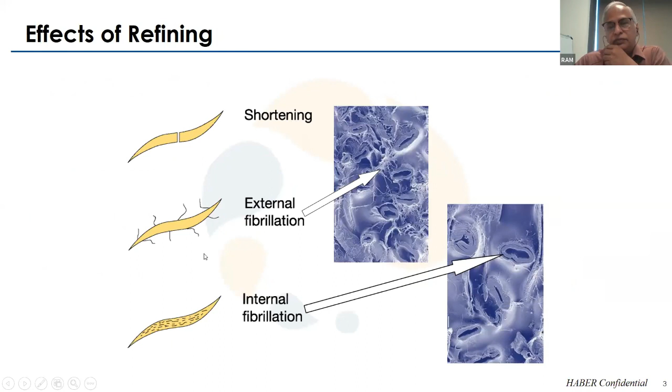So you are all masters in refining, but just to catch up at the beginning of the call - ultimately what happens inside the refiner is that either too much energy or bad operation can cause fiber shortening. There is something called external fibrillation and internal fibrillation, and the amount of energy given for refining very much impacts these as well as the paper properties.

So ultimately, the objective of refining automation is consistent freeness. This is very difficult to get in the absence of substantial amount of data being generated, which is hard to know, and typically there will be some process variations. In spite of this, how to get consistent freeness - that we will see.

And energy - before we talk about savings in power, it's very important to understand how much energy to provide for a particular situation, because each day it may be changing. So there will be a lot of factor of safety - if you want to give 400, people may be keeping 430 or 440 kilowatt also. So there is a blind area.

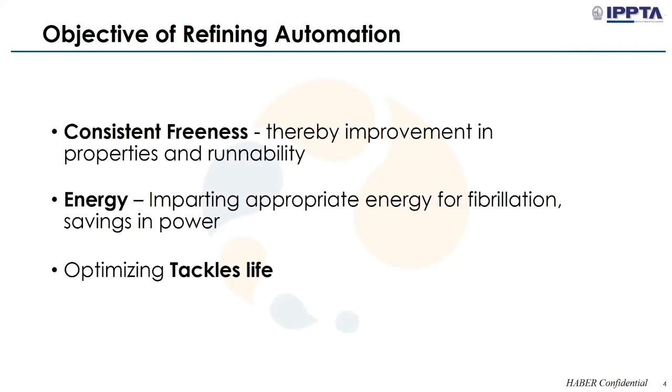So how to do it without this? You have a loose connection, it is making a voice. Please check the audio, there seems to be somewhere a loose connection. I think please check the plugging part or somewhere - I don't know where this loose connection is making sound. Just a second. Is it better? Yeah, much better. Please go ahead.

So the most important thing around refiner automation is, first, consistent feed to refiner in terms of flow and consistency, and also the recirculation rate, and differential pressure across the refiner, and the energy imparted into the fiber. All these three make it very important for a consistent operation of the refiner.

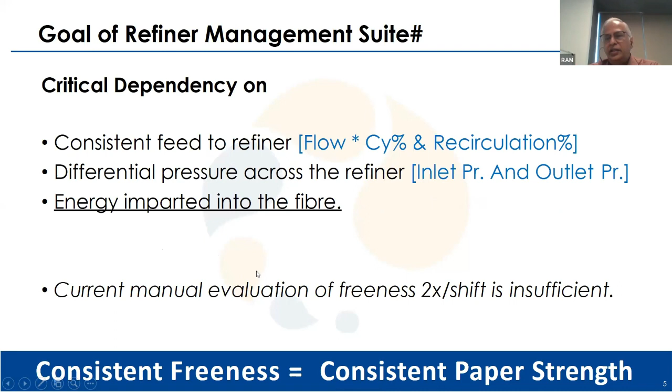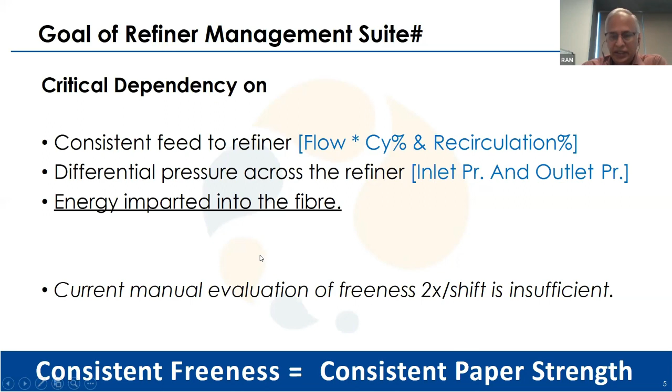Currently, the maximum that is done manually is an evaluation of freeness, which also takes certain time to get the results, and at maximum 2 times per shift is done. This is quite insufficient - unless we get consistent freeness, we cannot get consistent paper strength or quality.

So what is this? What we have designed is based on artificial intelligence, something called a refiner management suite. In this, the core area, we have tried to include every aspect around the refiner.

The hydraulics first thing is more important, as I said, is the hydraulic stabilization of process. That is the flow, consistency, and recirculation, how you balance the refiner. That forms a very important part. For this, every system has to be separately evaluated and certain modifications need to be made if required.

So that done, then there is a calculated energy management through artificial intelligence. There are a lot of options for virtual analytics based on which you can get very useful data, or process assurance.

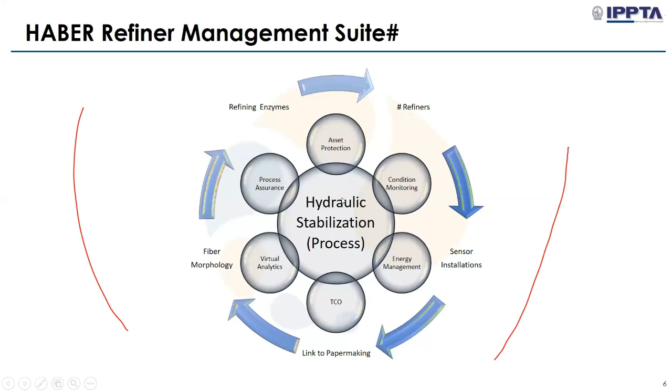Then we have also included the maintenance aspect around the refiner, that is the asset protection as well as condition monitoring, like refiner bearings, motor bearings, because these are the things that are also affected when things like plate clashing etc. are done.

And if there is anything specially that you are doing, basically we can add any sensors that you have in the field, and we can analyze the input, like any ash flow or anything like that. Basically any sensor we can also provide, so how that impacts your final net refining as well as paper properties, that can be done.

Then you are linked to paper making, your paper grades and properties. And if needed, this can also be expanded to include, instead of a freeness analyzer or in addition to a freeness analyzer, a fiber morphology unit can also be added. And with this you can even evaluate different refining enzymes or different tackle manufacturing.

So in a way that we have designed it, every aspect around the refiner is covered in this package.

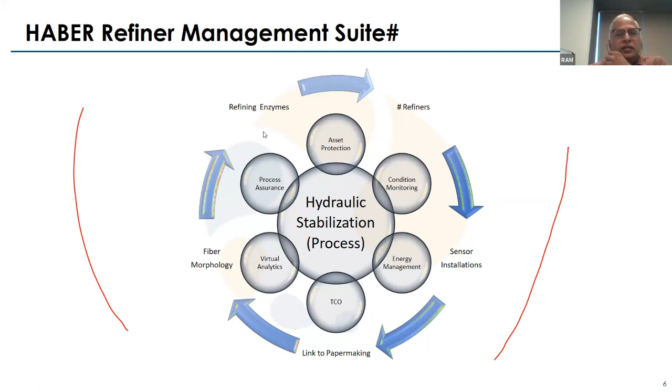So if you see the approach to a refiner management suite, the most important core central part is hydraulic stabilization process, you have process stabilization. You have to control basically flow, consistency, pressure, and recirculation rate. These form a very important part of managing the refiner.

And the influences are pulp pH, viscosity, and pulp strength. And energy optimization, how to evaluate and directly give only that much energy that is required to manage the fibrillation, and also measuring, frequent analysis of freeness results.

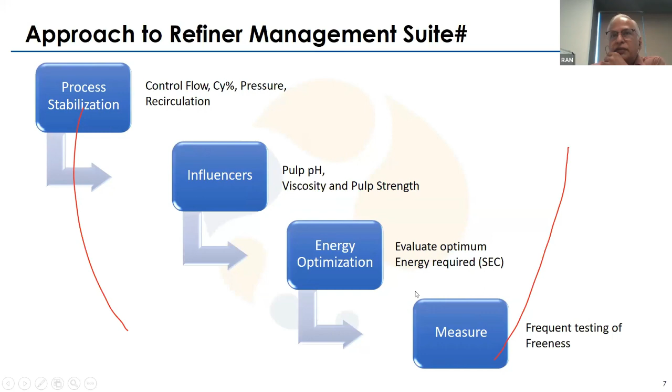The online freeness analyzer will be added to this. You will get, depending on the number of refiners, you will get readings at that much frequency.

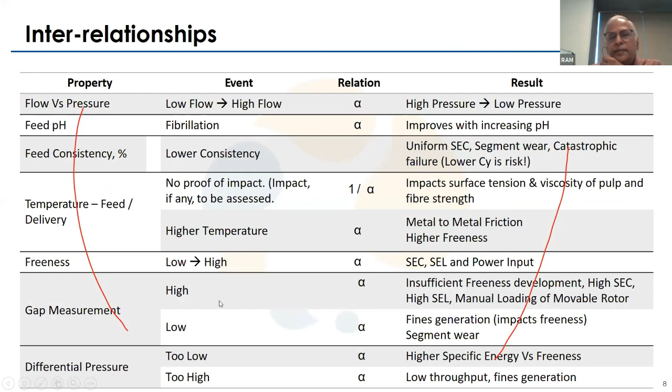This is the most important one, this will be constantly tracked. And then we track segment life in real time. So the segment loading, the new segment loading date and all will be entered there, and it will be tracked over the life, and there will be gap sensors.

So we'll see the change in gap depending on loading as well as the energy given. We can see how the segment is influencing the properties, and also the maintenance aspect, bearing conditions and motor conditions.

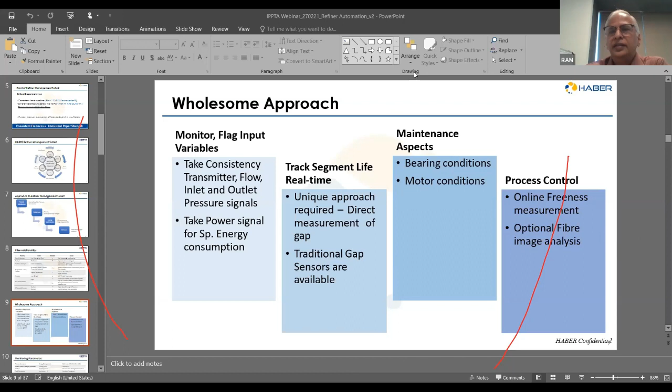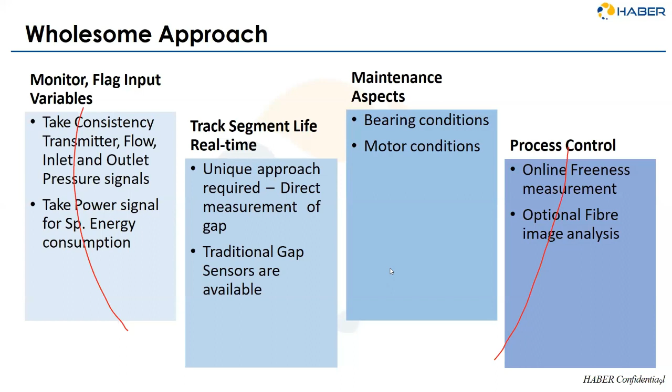So as we get into the process control, online freeness measurement as well as an optional fiber image analysis can be added. These are the 4 aspects we have divided it into, forming a complete package for your refining.

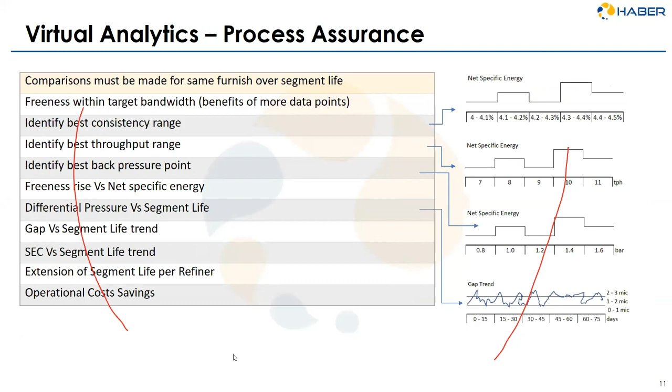So then, as I said, we can do virtual analytics as well for process assurance. Basically we assure that it's done as per the desired targets. So here we can compare as we collect data, we can compare different things. First important thing is the freeness we collect, and we can ensure it is kept within a certain target bandwidth, and what is influencing it most depending on your furnish, piping design, and everything.

We can identify the best consistency range by making a comparative graph trend of consistency range versus freeness that you get. This can be collected, and then artificial intelligence, through mathematical deductions, will identify the best consistency range to operate your refiner. Similarly for throughput, we identify the best back pressure points. For each of these process properties, trends can be developed and we can identify the best areas to operate.

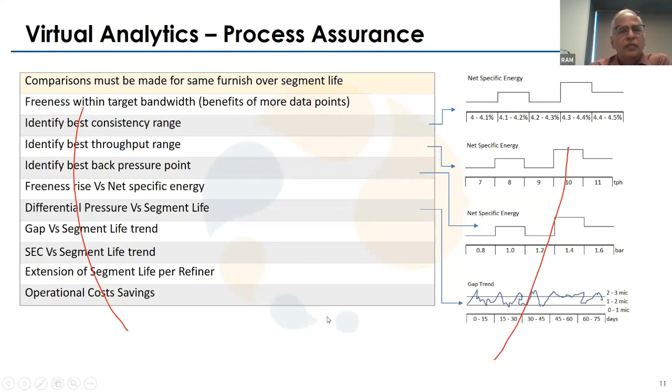We can link the machine operations also to the refining part. Basically, we measure the freeness after the refiner and manage the refiner operations accordingly. Apart from that, generally after the refined chest, some broke may be added before it reaches the paper machine, or some save recovered fiber may be added. These things may once again affect the freeness of the pulp before it reaches the machine chest, so if required, additional samplers can be used after the machine chest or mixing chest as well.

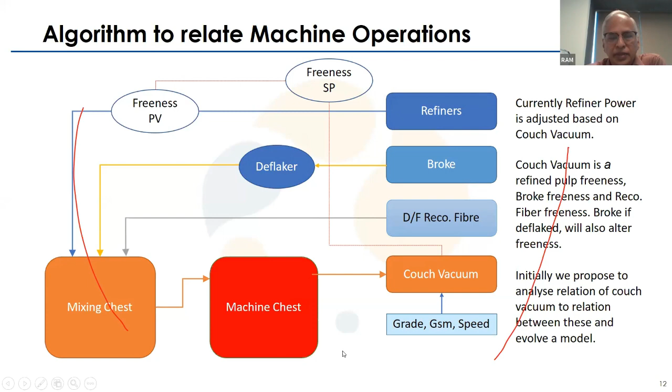Depending on the provisions made in your paper machine, or provisions we can add, we can take critical data like grade, GSM, speed, even headbox flow, Couch vacuum, and press loads, anything. Whatever you think affects the wet end formation or strength properties of your paper, against a survey of each paper machine, these things can be loaded and analysis made on how refining is affecting this.

Similarly, for paper properties, we can take each of these paper strength properties. Ultimately, refining affects the density of the pulp, and density in turn affects many strength properties of paper. I listed some, but it could include others like bulk, etc. Depending on that, once the duration is reached, a manual testing is done.

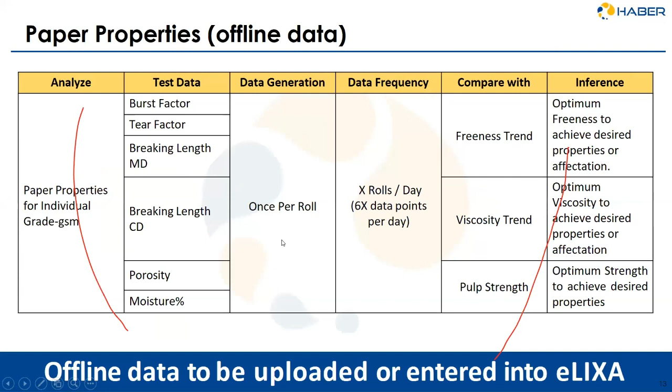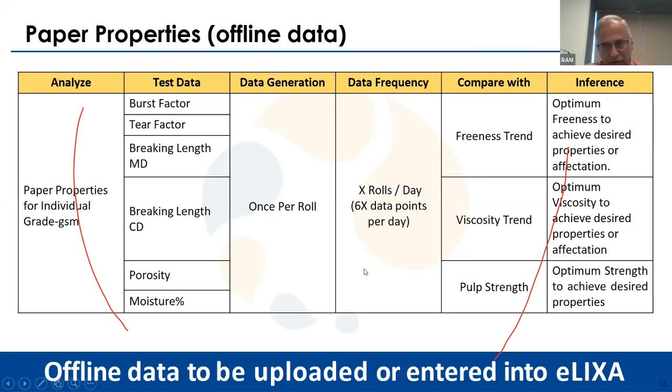These test results can be uploaded to eLIXA. There are many ways in IT now that you can upload physical data into the cloud. So if this provision is available, fine, or we can also make some provisions. So whenever a test result comes in, it can be uploaded onto the system, and the previous 1 hour of data will be analyzed along with the refiner operations. Depending on that, we can identify paper properties. This could be especially useful for specialty papers or high grade board grade papers.

Whatever be the type of refining, it could be by application pulping or stock preparation, this is applicable to any of the refiners. There is a certain importance to each of these refiners by type or position, so all this can be monitored here.

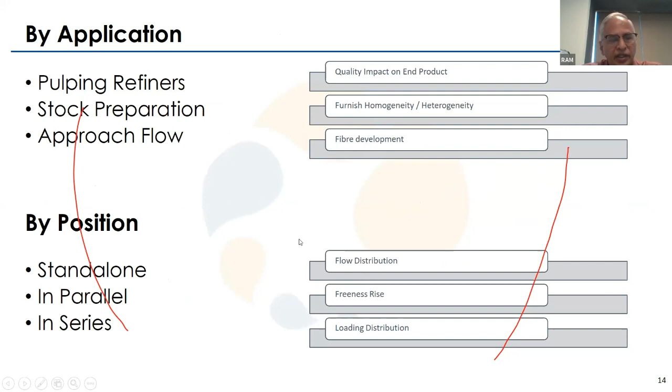As we go into the subject, one of the things fundamental to doing any automation is like computer language only, garbage in and garbage out. So it is very important that we focus on stabilizing the input variables.

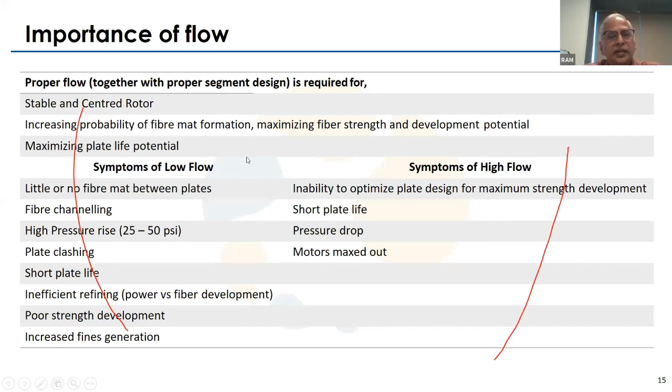Importance of consistency, again, is very important for hydraulic balance and even segment life, because refining consistency is directly related to getting the fibers onto the bar edge. So performance will be exponentially better in terms of consistency. We will choose the right consistency range, and we can experiment and choose the right consistency range based on this analysis.

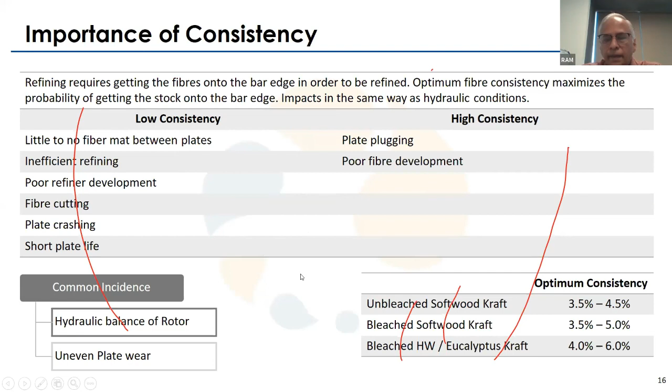So these are the rotors, most of the refiners, the central twin-disc refiners and all that, the rotor is centrally balanced. So the stock flow is very, very important to maintain the stock flow and a proper consistency.

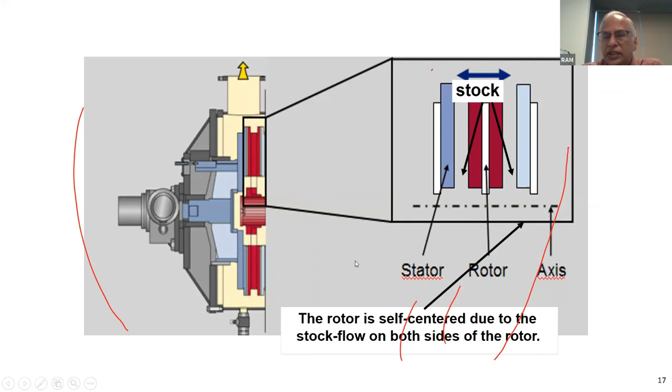So the root cause for flow variation, these are the possible effects. One is of course the variation from the pulping street, this can be optimized to the maximum. In many places there is a lack of level control. The chest level control greatly affects the pumping ability of the pump because of higher consistencies. So it's very important a good level control is managed, and the level is also maintained at a very nominal level within a very small bandwidth.

Retention time of the chest, the rightly sized chest, is also important. And also type of flow control, whether it's a VFD in the pump or a control valve - depending on that, the plus and negative effects can be taken into account, because the way each of these controls the flow is slightly different.

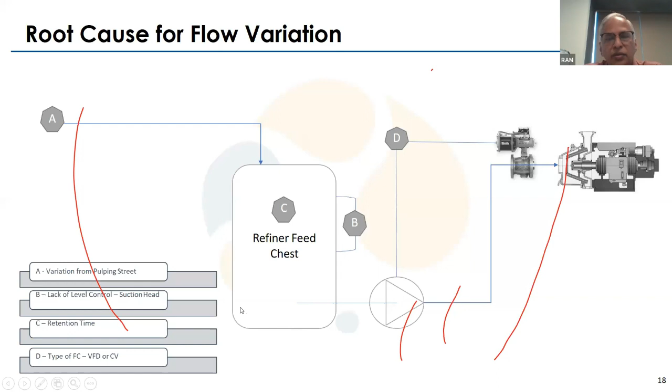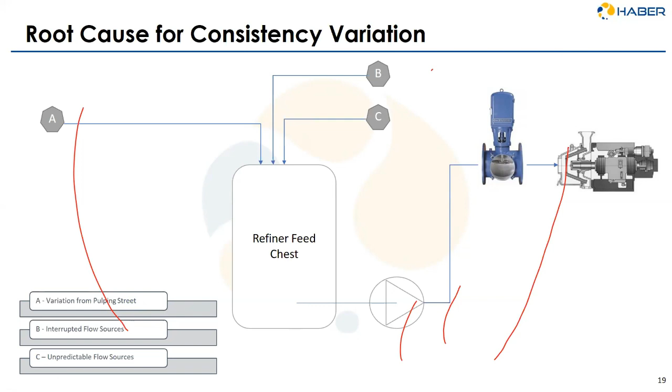Unpredictable flow sources - in some cases there are even people connecting directly couch pit pulp or anything like that, which nobody knows when it will increase the consistency, the flow, when it will be available. So a lot of these unpredictabilities around the refiner feed chest should be removed. The refiner feed chest becomes like the heart of the operation of the automation system, so this has to be dealt with with a very sharp eye.

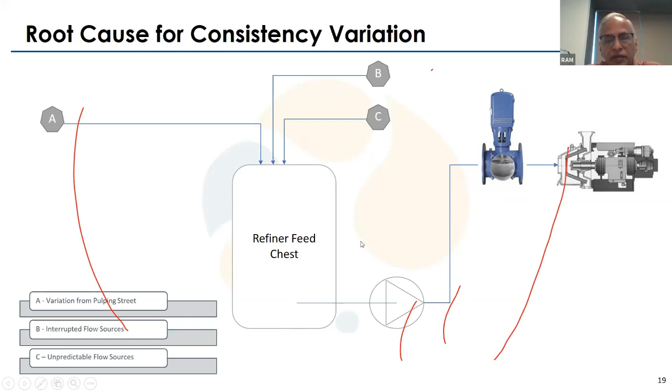So this is an ideal flow and consistency control ahead of the refiner, and the importance of tank level also. Many people operate 0 to 60% or 0 to 40% down - these things can be avoided because each level change affects the performance of the pump greatly.

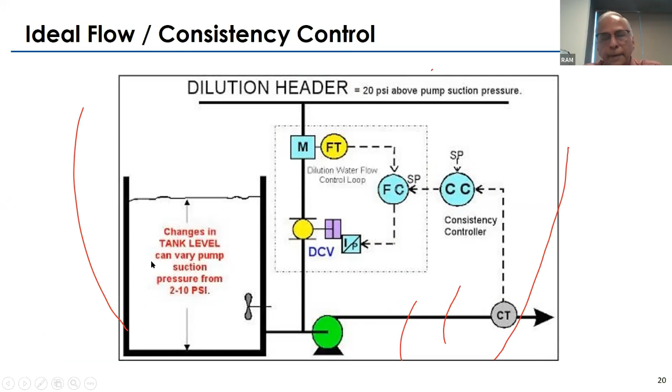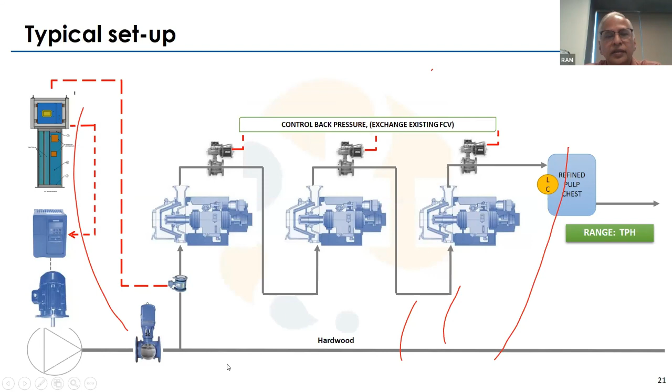Freeness analyzer sampling depends on a survey of each system depending on number of refiners. It's typically like a 3 refiner in series, and we can take a sample for input pulp as well. Usually depending on the Freeness analyzer, you get the number of samplers. There are also other models where you can increase the number of samplers. Basically, we have to work out how many points you need a sample to be tested. But the only thing to keep in mind is the more samplers you add, the less time within an hour you get per position. Like if you have 4 samplers, one particular position will get 15 minutes of data. So it has to come in cycles, and this can be managed.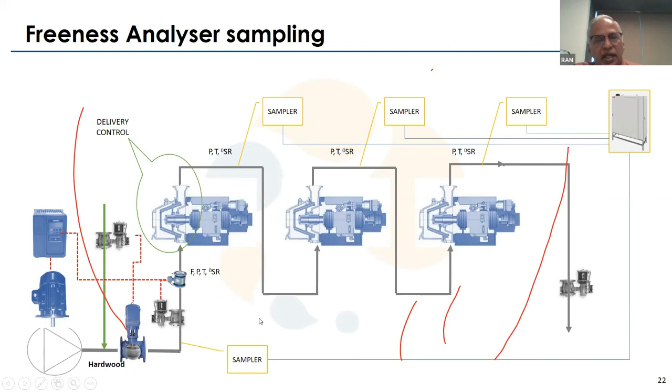Typical field instruments can also be connected to the Elixa control, and apart from that, anything missing can always be added. Because of the interrelationship, all this data is very important in identifying the root cause of problems around the refiner.

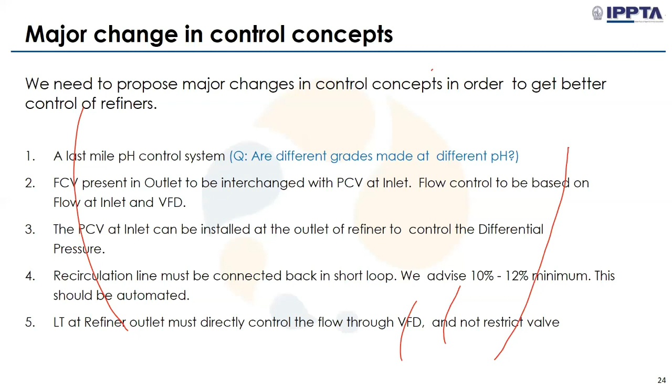So when you have a flow control device and suddenly constrict or throttle the flow at the outlet of the refiner, you inadvertently make a change in the pressure around the refiner, which in turn can affect the differential pressure around the refiner. That's why in some cases, particularly in series or parallel configurations, when you control the output flow, if there are 2 or 3 refiners, one refiner may not be equally loaded - it becomes highly loaded, causing plate clashing or excessive heat generation. This is observed in many cases.

So one of the things we recommend is that the FCV present at the outlet can be interchanged to the inlet, or we can have a VFD for the refiner feed pump. The set point for this can be arrived at from your refined pulp chest level, or it can be made a standard set point, or the level control of your refined pulp chest. That set point can be generated for the flow, and the VFD controls the flow of the pulp.

Similarly, a PCV at the inlet can be installed either at the inlet or outlet, but that's only a marginal adjustment difference. A recirculation line must be connected. It's very important - theoretically as well as from several practical attempts, even by TAPPI, everything has shown the recirculation rate must be between 10 to 12%. Only then is the benefit of already refined pulp going into the refiner derived.

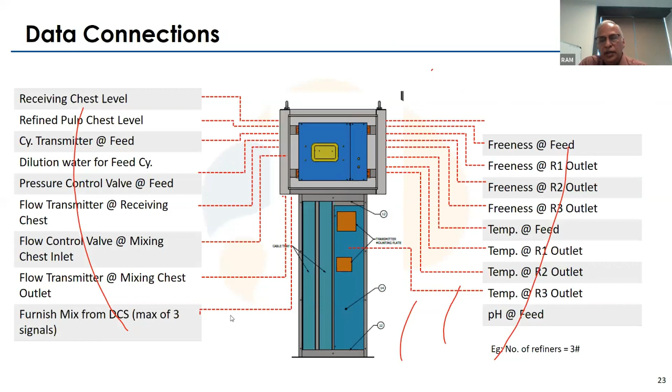In many places this is not done - less than 5% is recirculated, or in some cases the recirculation line goes back through a very long route, sometimes to the top of the refined feed chest, where it loses its ability to give the benefits. So it should come in a very short loop, either back to the feed pump suction or just ahead of the pipeline itself, ahead of the refiner.

And the LT at the refiner outlet must control the flow through the VFD, as I already mentioned, and not restrict the flow through a control valve at the outlet of the refiner.

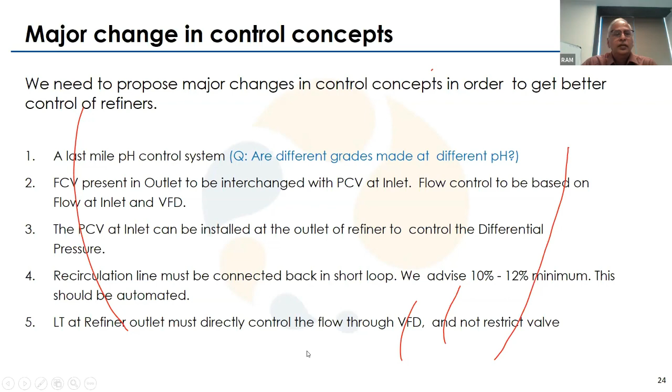So these are some of the problems when you have refiners in series. If you have a flow control valve at the outlet and you're just managing the level of the refined feed chest, the third refiner is very likely to have issues because the inlet PCV of the first refiner maintains a certain pressure, and there are subsequent pressure drops around each refiner. Sometimes even between the first and second refiner, a pressure let-down is done. But regardless, each refiner works at a set of differential pressure points. Particularly when you control the FCV, the third refiner will very likely handle uneven differential pressure, due to which it may get heated up, or higher wear of the segment can happen.

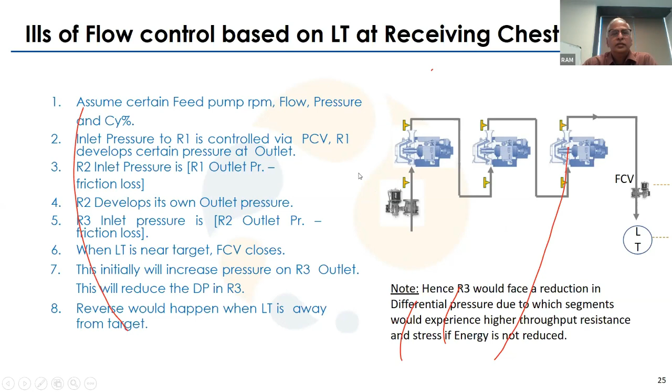So then there's energy input. There's a lot of theory around this, and the most important thing is to calculate the no-load of the refiner. No-load is defined as, in the absence of pulp, what load is taken by the refiner. But while it's easy to say in theory, in practice it's very difficult to consider, because once you have only water inside, unless you have furnish inside the refiner, it's very hard to balance the stator and rotor. So you cannot just run an empty refiner — it's very risky because you might damage the segments.

You can damage the segments, and even the measurements you take, the pulping effect will not be very uniform. Basically the hydraulic load that develops on an empty refiner has been studied many times, just to theoretically calculate it. But if you try to practically do it, it's very hard to sense the exact power consumption at that point. So for no-load calculation, we can do that.

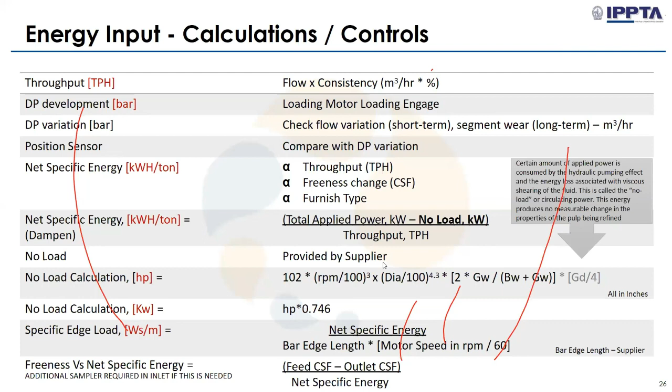I hope I have covered most of the questions. If there is anything further, you can still write to us, not an issue, or we can address it at the end of the session.

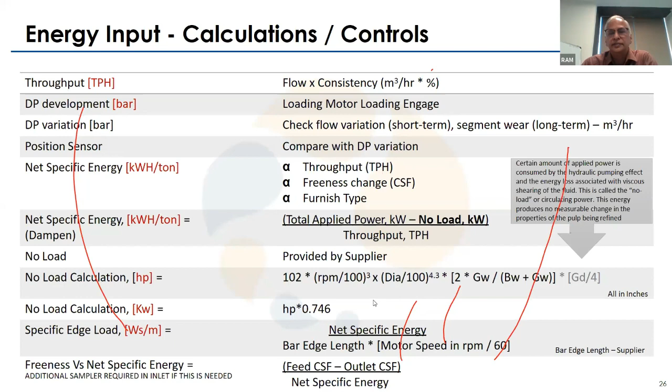So widgets are basically something like your dashboard, similar to what we have done in Elixa for many of the other applications as well. Particularly here, when you have more visibility, more parameters or trends visible on your dashboard immediately near the refiner DCS room, you have better control of the refiner.

There is actually no limit to the number of widgets you can have, but depending on preference, certain things you can see very quickly online, while major calculations you can view later in the records, or download as Excel or CSV files and observe.

So basically you have a number of very important things around the refiner like production rate, recirculation percentage, refining hours, freeness. These are just general plant data, and these can be made visible immediately on your dashboard.

Then there are certain comparative trends immediately, like minute-by-minute trends for processes such as freeness and feed rate, or freeness versus consistency. All these comparisons are available per second on your screen, so you don't have to do a post-mortem exercise. That will be another advantage.

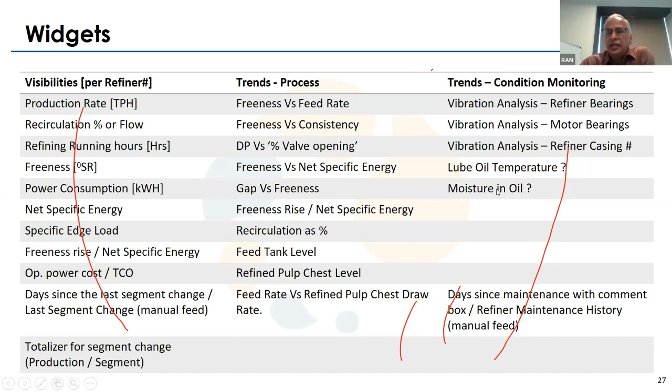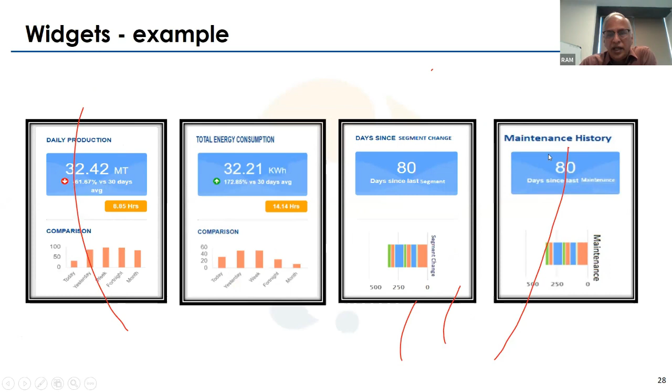This is how the widgets will look like, typical for any application showing daily production and how it's comparative to previous days or previous months. A very quick view of your daily production, total energy consumption, how many days since your last segment change, and your maintenance history, how many days since your last maintenance. These are the things on the production level.

We can have feedback on how much production has happened per segment since it's installed. This way we can compare back-to-back different segments from different suppliers, or a different design of segment. This can be done. And for energy consumption, you can compare different trends, energy consumption versus flow and consistency.

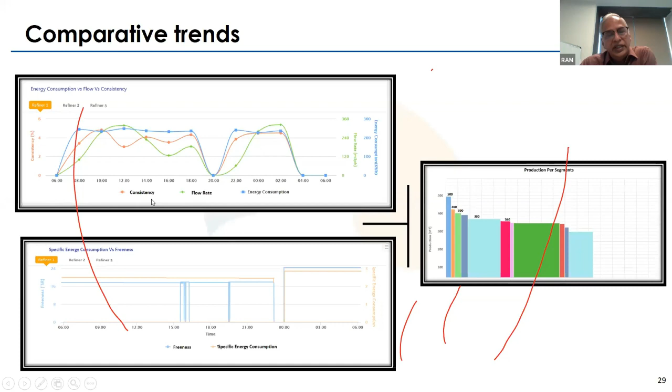There is an option where if you don't want to see consistency, you can switch it off, and you can see only flow rate and energy consumption. Similarly, if you don't want to see flow rate, you can switch it off at a click of a button, and you can see consistency and energy consumption.

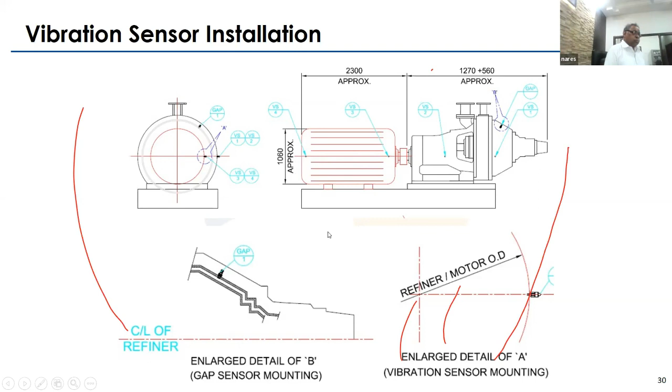Then there will be, because these are high powered motors, a drive end bearing sensor and a non-drive end bearing sensor. So you can have a trend of this also.

There are two ways of seeing this. One is what we call the raw data from the vibration sensor - as it picks up, it is transmitted, it is evaluated, and a trend can be made. Or where required, depending on customer, if root cause analysis needs to be done, we can have a Fourier transform analysis, FFT analysis done also, based on which you can find a root cause analysis for each of the vibrations.

Sorry, please ignore the red lines that is showing up. We don't know where the source of it is.

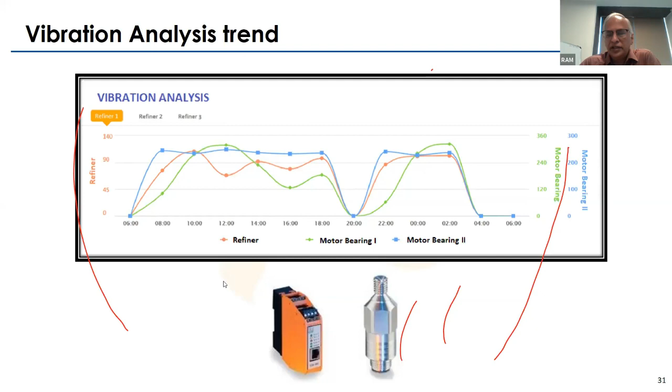Coming to gap sensors. This is typically shown for a conical refiner here in the drawings, but in a tri-disc refiner or a double-disc refiner, the fundamentals are the same - only how we mechanically install it will vary. That we will survey for each machine and identify.

We will calculate the sensor capability based on your typical erosion thickness of your stator and rotor, whether it is maximum 5 mm or 8 mm or anything like that. We will evaluate it, then have it installed here. This will continuously give the micron difference between stator and rotor.

As the gap increases, we can also analyze whether the erosion in the segment - say your segment is coming for 90 days - we can analyze the energy that is needed within the first 30 days, 30 to 60 days, or 60 to 90 days, depending on the erosion level.

More importantly, there are several times segments are removed based on past experience - okay, last time it came for 50 days, so I should now remove it at 48 or 50 days, we should be ready to remove. In this case, it may not be necessary because we will really be assessing the erosion level, and only at some point can we detect, yes, it can be a planned shutdown, yes, the segment has to be changed.

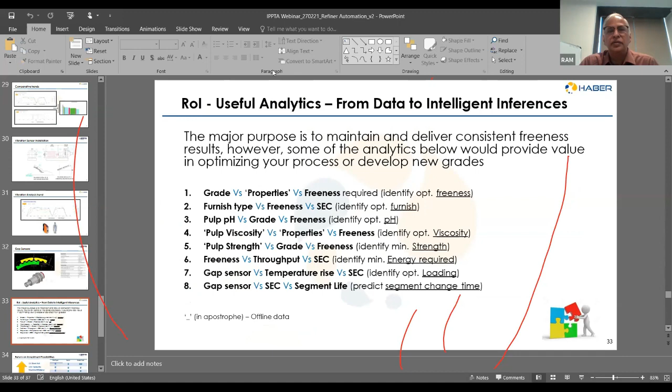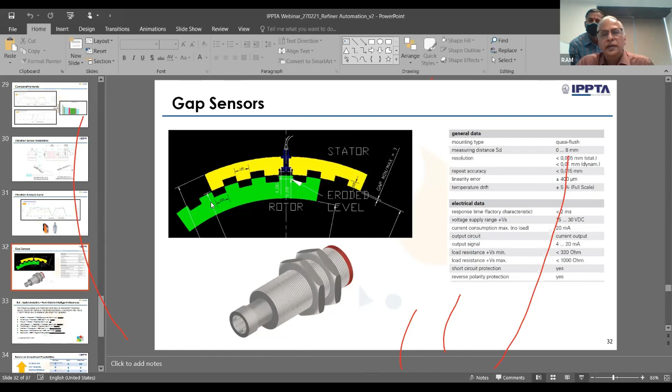Whether this refiner control package includes fiber morphology measurements, that's a question to you. Yes, it can be made because it is only an added instrument. This can be tailor-made. Like I said, you can have a freeness analyzer, you can have a fiber morphology analyzer, or you can have both. The package can be tailor-made.

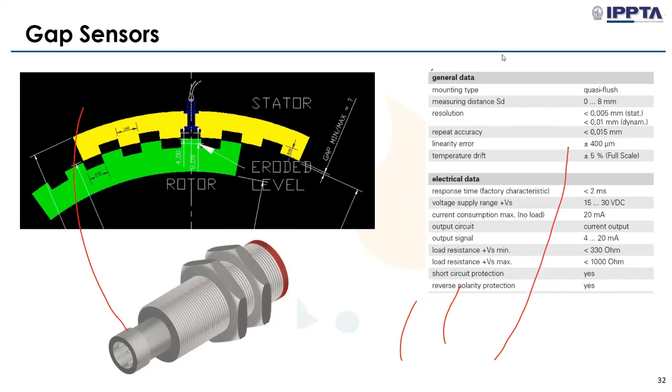Can you show a live example? We don't have one right now, but this package is in concept stage. Whatever we are proposing, this algorithm for doing any process optimization, we have live projects involved, like we have for a pulp bleaching plant. We are getting very clear pulp brightness targets on dosage, retention time, etc. And we are getting a very good bandwidth of pulp brightness. So basically, this method of algorithm development is only like a software, and even if we notice certain error, this can be corrected in our next version of the software. So nothing goes terribly wrong. Basically, we can do continuous improvement all the time. It is possible.

Does refining enzyme retain the final strength properties? Yes, instead of me saying it will work or it doesn't work, what this program can do is make a better judgment of comparison between with and without refining enzyme, or between two different refining enzymes. What it can do now is give you more data to compare, keeping other things constant, we can pick what the refining enzyme is really affecting, and we can give you a better analysis so that we can remove the judgmental errors in that.

Some concept comments on machine refiner located in the approach flow system? I think it is all the same. Like I said in one of my slides, irrespective of the position of the refiner, we will discuss with the customer on what is the more core important thing around that refiner, what they are trying to do, even if it is a proper refiner freeness race. We will discuss depending on what comes out of the survey. Whatever is important, we will focus more on that.

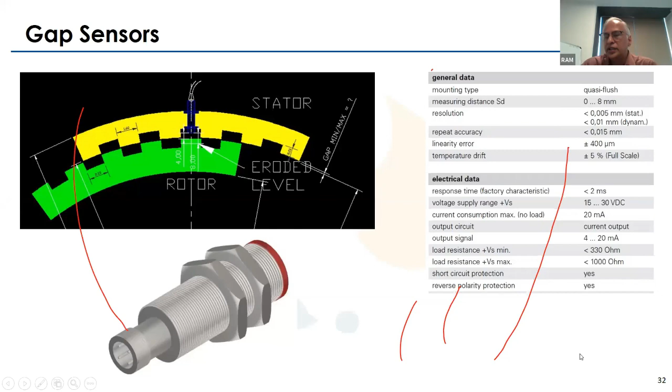I think all questions are done. I am hearing a child's voice and a lady's voice despite everybody having been muted. Can somebody help us, please? Please go ahead.

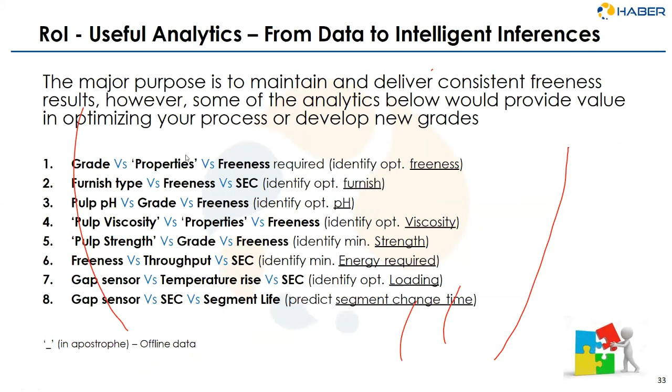Coming to, after doing this, I hope this concept is clear. Now, return on investment, so it's a little back and forth. Particularly, there is not a big investment in the first place. You don't have to invest, but I'll come to that later. But the return on investment, we will give the first priority.

Like we said, it has been written everywhere that one of the most important operations within the paper industry is a little blind. We don't know much about what is happening around the refiner. One of the best returns you get from this concept will be, first, the knowledge around every aspect of how the refiner operates, then monitoring. We'll go to the monitoring next.

Like I've written here, there are different options that you can compare: grade versus properties versus big data crunching. Basically, from the data, it is generally not possible like doing a post-mortem Excel sheet analysis or anything. But here, we get a live analysis of the situation, and we can draw out any kind of report that we want, compare anything to anything, whether it has an impact, or the algorithm itself will sometimes find a match. If we put it on observation mode, the algorithm will find which one is affecting, and by what percentage, your final end results.

So likewise, I have written here some about comparison of different aid with a certain specific focus, like you want to identify optimum freeness or optimum furnish or optimum viscosity. This can be done. This will be a great tool in the hands of paper maker and it will take your time away, even if it's an old system, you can reset it to a new level of knowledge or a different level of operation. That will be the advantage here.

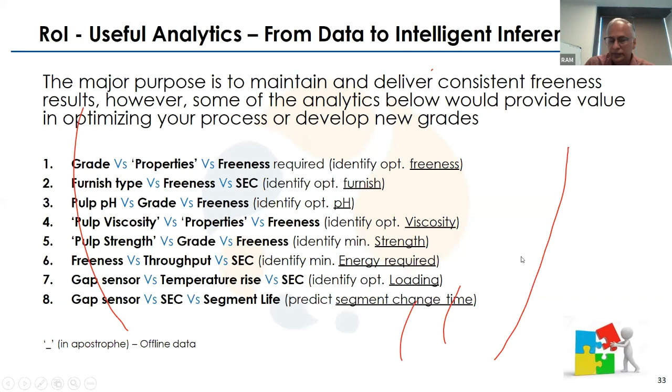And typical, many times when we say a paper machine we are not able to run, because probably there will be a lot of breaks. When it will be running well for an hour, then when we try to increase the ash percentage or take advantage of it, the paper break will start. Then by doubt, we will get back and even give a lower ash target than what was actually running, so we will be going back and forth. Who knows, maybe within that one hour, the freeness was changing or anything like that.

Depending on that, once we are able to get whatever freeness that we want, if we are able to maintain it consistently, then it is possible that we can have a controlled increase of sheet ash. So we feel that even about a 1% sheet ash increase is a very practical target. Even if you do that, most of you will have a good return on your investment. And then a very nominal 10% tackle life we are putting.

Like I said, it can be two ways, not necessarily one is planned. When you take out the tackle, it can be a little more planned than what we do now, so you might get some saving. Then the amount of information that the gap sensor gives you, we can avoid a lot of erosion, particularly the vibration sensors as well as the gap sensors, the information they give. And also based on other parameters, first you are running the refiner properly with the flow and consistency, so that will enable a better tackle life. We can extract more from the tackle.

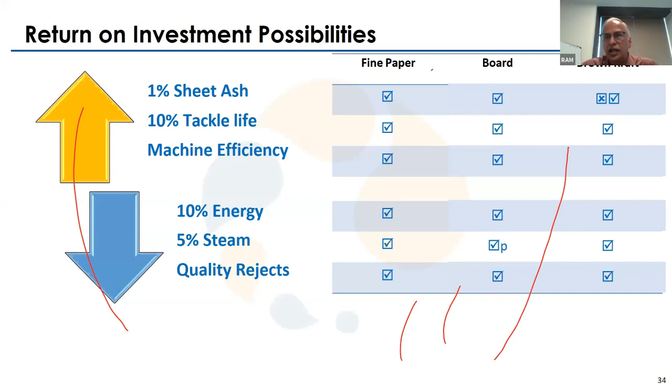And the third is machine efficiency. Of course, we can avoid the breaks, and it depends on each machine what we take and what impacts the machine operation, we can take it for observation. So basically all these advantages are available, I think, across the grades. It can be done. In some cases it may be partial, like in board grade, because maybe in the filler layer you may not be doing refining much or focusing on that, so there the saving may be a little partial. But apart from that, across the grades, you should be able to get some benefits.

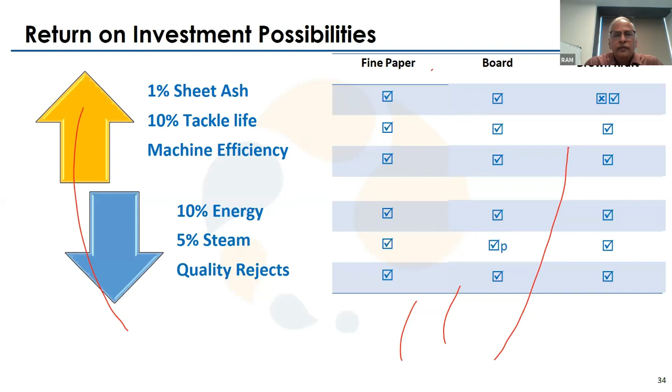There can be a flexible tenure greater than 36 months. And we are also flexible that any field instruments or any particular specialty instruments that you need, if you are not able to procure, we will put it as part of our package. So it will basically be a win-win model that you have a fixed monthly rental, so it doesn't give you extra, basically it removes the risk out of your investment. That is the big thing, capex investment, and benefit sharing, whatever benefits that arrived at, that we can share equally. So this is the concept.

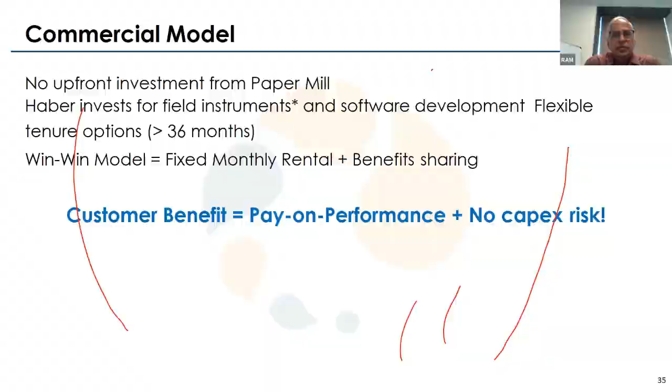So how do we do it? The implementation is first we have to do a survey of your system, then identify your goals, what are the problems and what are the things that you face, what is more important to you, what are the pain points for you, and then identify alterations to the existing system setup. Like I said, the flow, consistency, everything, whether it will happen as per our desire or not, any small changes, and then complete the required field instruments, and then develop a system to upload manual data online. These are things we need to discuss, and identify ROI possibilities. All this if done, we are ready to go, and then basically the lead time of the items to come.